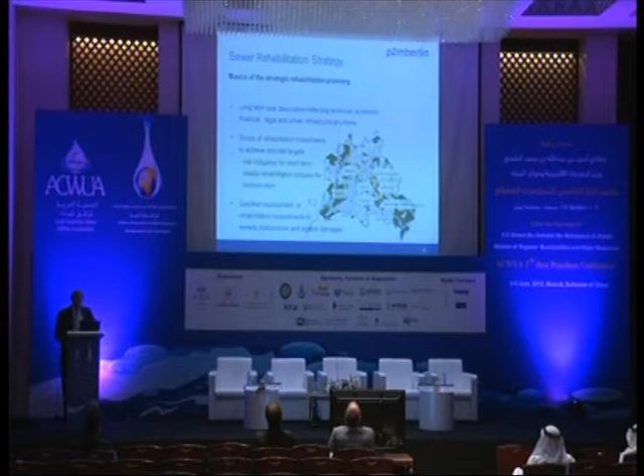Our strategy is looking for a reliable long-term investment strategy, to mitigate the risks from deteriorating assets, and all this strategy is based on very, very detailed data gathering and a geographical information system. Let's have a look at Berlin itself. You see here the size of Berlin. We have a size of 40 kilometers from west to east, and 30 kilometers from north to south. And sewer rehabilitation for us is a long-term task, describing technical, economical, financial, legal, and urban infrastructural criteria. And our targets are to mitigate risk in the short term and a steady rehabilitation process in the medium term.

We started with this process, with this investigation of our network, 15 years ago. We started on these yellow bullet points, on 8 pilot areas with a length of 170 kilometers of our network. Remember, we have a 9,400 kilometer network. We investigated 15 years ago with the first camera inspections. We evaluated these camera inspections. We made a condition evaluation and we selected the first rehabilitation measures, and we started at that time with these rehabilitation measures and to find out what are possible rehabilitation measures.

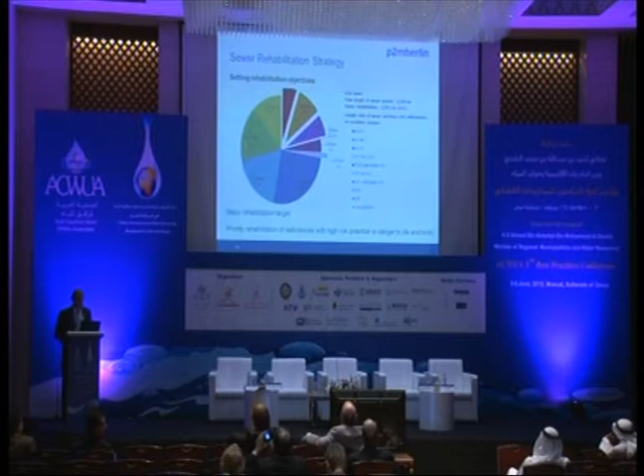So you can see this here, all that is red, yellow, and violet, that's the ratio, about 1/4 of our network which is in a bad condition. And our major rehabilitation target is to find a priority rehabilitation of different deficiencies with high risk potentials, for example, with a danger of life and limb.

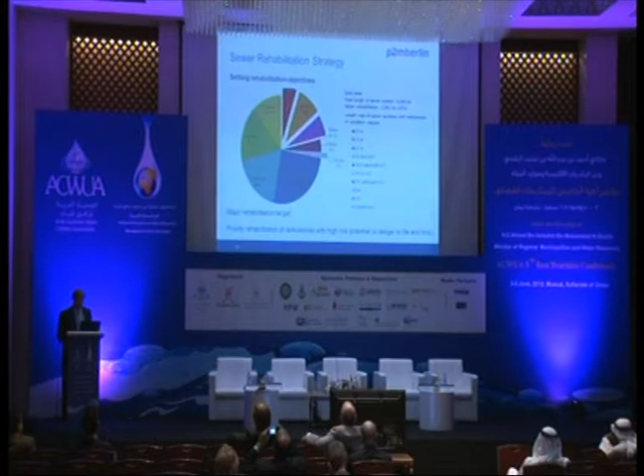So we can define on this knowledge now where we found hotspots for the priority rehabilitation. You can see that there are some red and yellow colored hotspots, and in these hotspots we have to start with our immediate rehabilitation, but that might be not very efficient.

And therefore we usually look for a circle of about 5 kilometers, and we look whether it is possible to rebuild more sites, more deficiencies, and we summarize all these deficiencies in a circle of 5 kilometers to one site, because the hotspot might be too small for a site for a construction company.

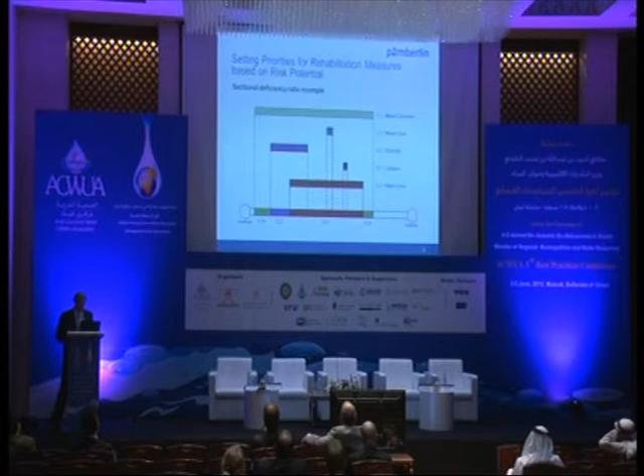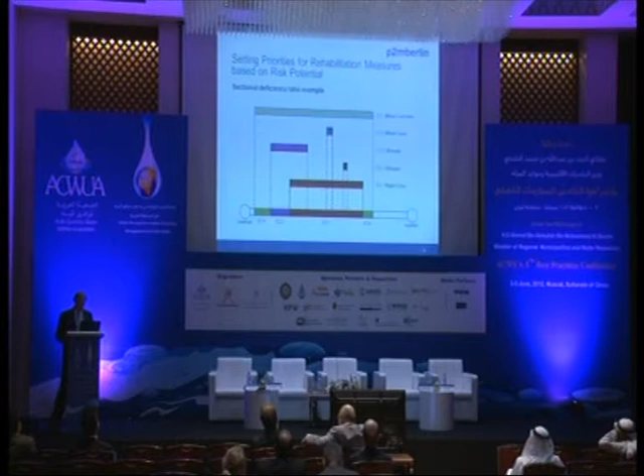Now let us have a look at one pipe between two manholes. These are example results by camera inspection and evaluation on that. And you can see we have different condition classes. We define different condition classes.

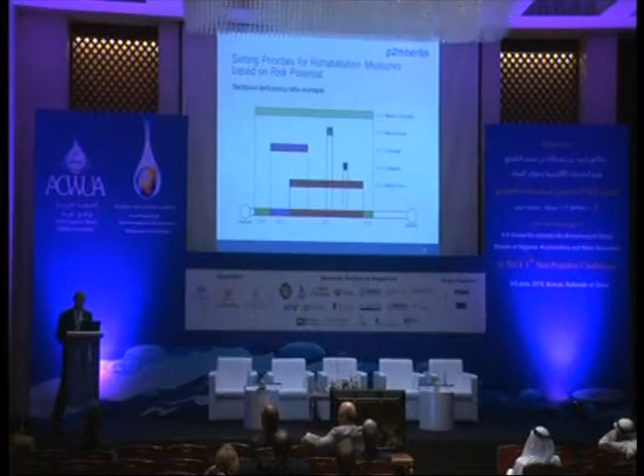There is a condition class CC1 with major cracks, CC1 also with collapsed pipes. We have CC2, condition class 2 with obstacles, CC3 with minor cracks, CC4 with minor corrosion. And there is another class, CC5, where no rehabilitation is needed. You have seen it, the green, 77% of our network.

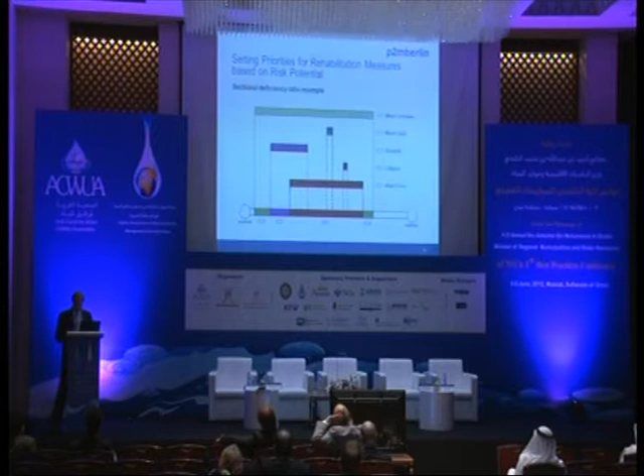After identification of these rehabilitation classes, we have to decide what to do with it. With rehabilitation class 1, we know those are short-term rehabilitations. We have to do the rehabilitation at once. Condition class 2 to 4 means medium rehabilitation or long-term rehabilitation. Medium rehabilitation within the next 5 years, long-term rehabilitation within 5 to 20 years.

CC 1 to 3 in water protection zones means short-term rehabilitation too, and as I mentioned before, CC 5, there is no need for action. That looks a bit complicated, but I try to explain it.

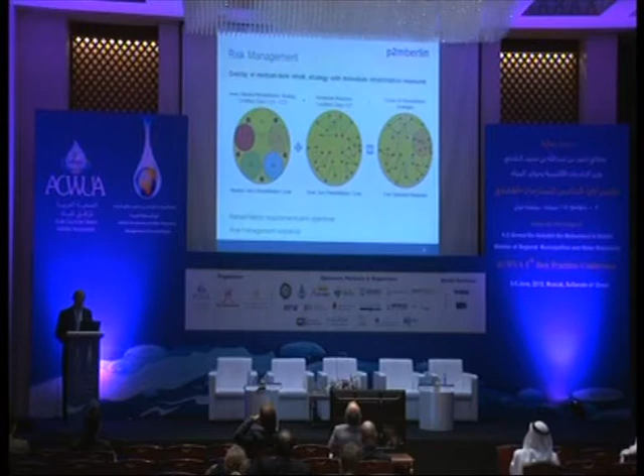The idea of a cost-optimized rehabilitation can be seen here. An optimized overlay is achieved when the chosen rehabilitation area covers as many condition class 0 deficiencies as possible. That's the case in A1. Time targets and determination of rehabilitation areas are key scenario drivers. The evaluation of scenario input and impact leads to a recommended holistic scenario with defined boundary conditions for the sewer rehabilitation master plan.

So here we see one very important result of our philosophy in rehabilitation in Berlin.

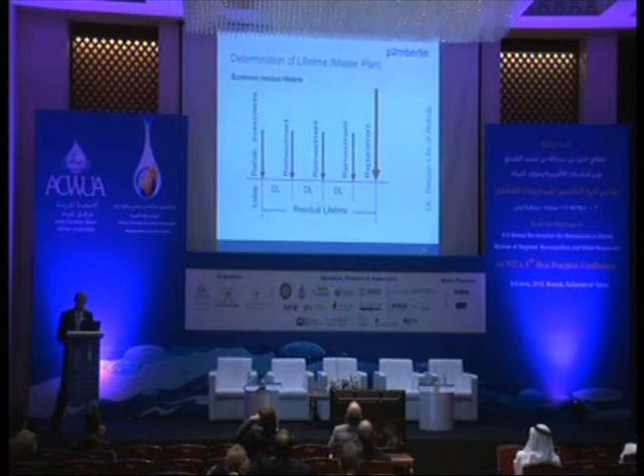I have 2 minutes left.

I need 1.5 minutes. Based on 15 years of experience, we assume that we can reinvest our repair up to 3 times before replacement of a pipe. We can repair a pipe 3 times before replacement. That is the most economical way. We are not quite sure of that result. Therefore, we have to investigate more on that, and we have to compare it with the results of other utility companies. But that seems to be the overall solution.

So, I come to the conclusion. Berlin's rehabilitation strategy represents a classification system which distinguishes the protection objectives, which are structural integrity, leak tightness, operational and legal security. The rehabilitation master plan of Berlin is based on certain preconditions: clear definition of objectives and requirements, setting of priorities. The scope of deficiencies to be rehabilitated and the due time frame are primarily determined by boundary conditions,

and these boundary conditions are short-term rehabilitation of deficiencies with risk of liabilities, medium-term rehabilitation of deficiencies to ensure network reliability, budget limitation for capital and operational expenditures, protection of groundwater resources in water protection zones, and long-term preservation of net asset value by fully implementing life cycle costing.

And you can see that all North America, big parts of South America, big parts of Africa, Asia, and the Arabic world are covered with problems with sedimentation and siltation. Looking at the graphs on the right-hand side, you see the solid blue line. That is the global storage volume for water. And you can see that it is increasing, which means it should increase.

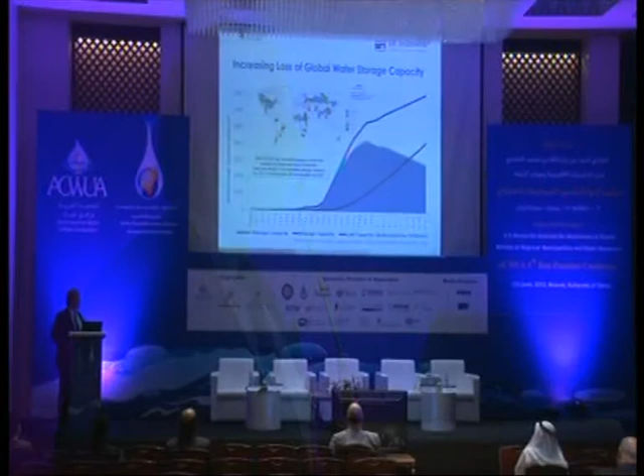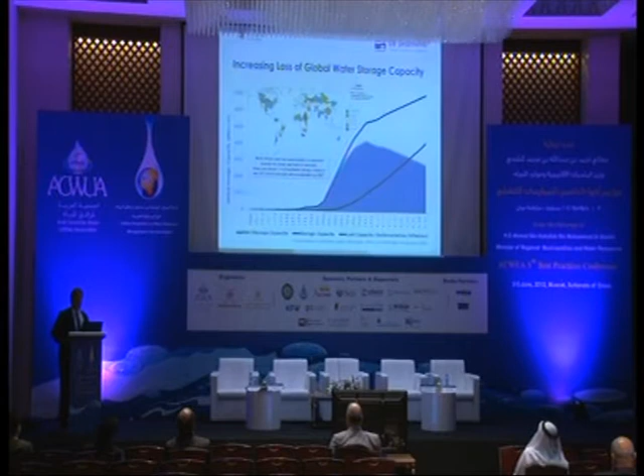But what has been neglected is that there is a brown curve coming from underneath, and that is the curve of siltation and sedimentation. You can see in the solid blue part that the peak of the net capacity of the global storage volume was about the year 1985. And although the volume is increasing, and a lot of money is spent in order to build up capacity for hydro storage, the actual volume has not been increased since 1985.

I will give you some numbers. Since 1985, there has been a sum of 2,000 to 3,000 billion dollars of investment, and this investment has not led to one additional cubic meter of storage capacity for water, but instead there has been a decrease of about 10% of the capacity.

Now we want to look at the downstream side of a dam and what missing sediment is causing. I'll give you an example. In Germany we have the river Rhine, which is one of the predominant rivers in Germany, and there you have a gravel stone the size of 2 or 3 centimeters, or 1 inch. And this gravel stone is transported 400 meters every day. So the water is transporting this stone.

If the stone is held back in a dam, then the force of the water still exists in the downstream area, which means that the force will look for new points of attack. There are 2 possibilities. One possibility is to find a new stone that can be transported downstream. The other possibility is that the speed of the water is increasing. So you have erosion and you have floods that are influenced by missing sediment.